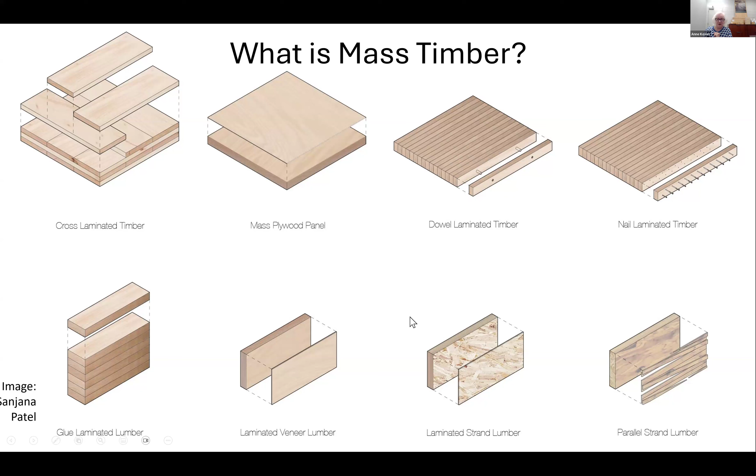I wanted to share with you some of the reasons why I am so committed to mass timber, and I think you'll share some of them with me, knowing as I do what your interests are and your passions as OWA members and woodlot owners. The first are the environmental benefits of mass timber.

Here I've very quickly indicated what I see those as being very compelling reasons. They lock in more carbon than steel or concrete. They have decreased emissions associated with them. The potential for reuse is enormous. And renewable sourcing — and by renewable sourcing, of course, those of us who understand forests and manage forests understand sustainable forest management.

It's exciting to talk to OWA members because I don't have to go into much description. When I talk about sustainable forest management, you understand very much what I'm talking about. Most of your properties are operated under a managed forest tax incentive program, which requires you to do responsible forest management for conservation purposes or for some commercial purposes.

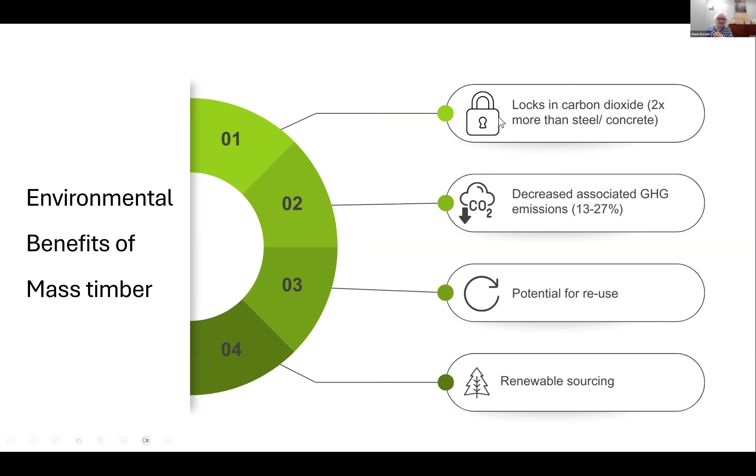We had a number of pulp and paper mills; we're now down to maybe 3 or 4. We had a number of veneer and panel board mills, and we're now down to 6 or 7. So the number of enterprises in the Ontario landscape with respect to forestry has really declined. And for those of us who are foresters, forest owners, conservationists, or environmentalists interested in what we're going to do with our forests, there has been a huge change in the Ontario mill landscape, which requires a reimagining on our part about what is the best end use for our wood.

As we know from sustainable forest management processes, we have the most extensive, highly regulated sustainable forest management legislative scheme globally. Anyone in the forest industry will complain and tell you about how difficult and challenging it is to conduct forest operations in Ontario, and that's something that's both challenging but also something we can be proud of. So I come to the conclusion that we have wood, and what is the best value for the wood that is available for us. And that leads me to the conclusion that we need to have higher value for our wood.

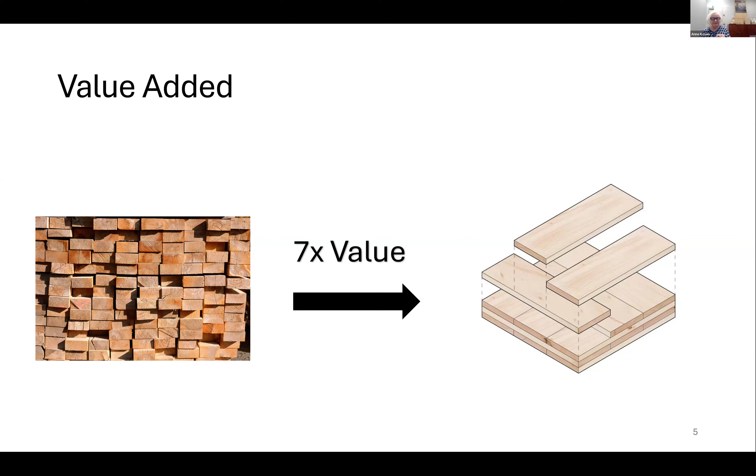One observation that I've had about the mass timber sector, and again, I'm sitting here at the University of Toronto in downtown Toronto, is that there has been, certainly for the last 5 or 6 years, a great deal of excitement about mass timber, but I would describe it as a bit frothy. I see lots of plans for mass timber buildings, but I see many fewer mass timber buildings being built than I think the publicity suggests is happening.

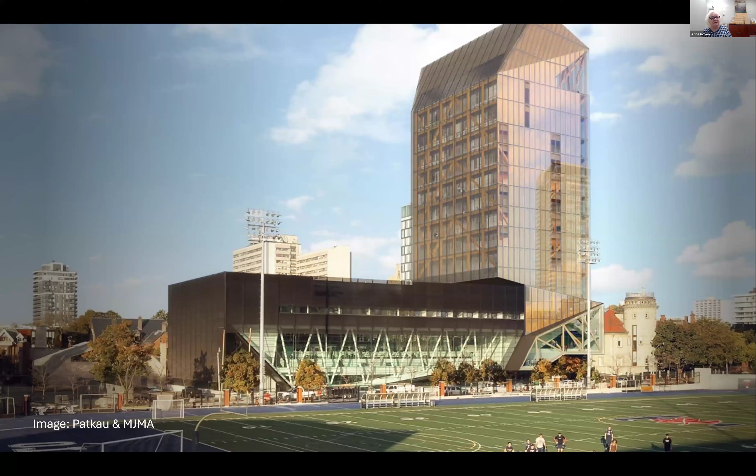This is the infamous U of T tall academic wood tower that's going up at 100 Devonshire. I was at one of the first meetings where we discussed building a mass timber building at U of T. That must have been back in 2013, 2014. It's just being built now, so you can understand the amount of time it takes to plan and actually get a mass timber building built.

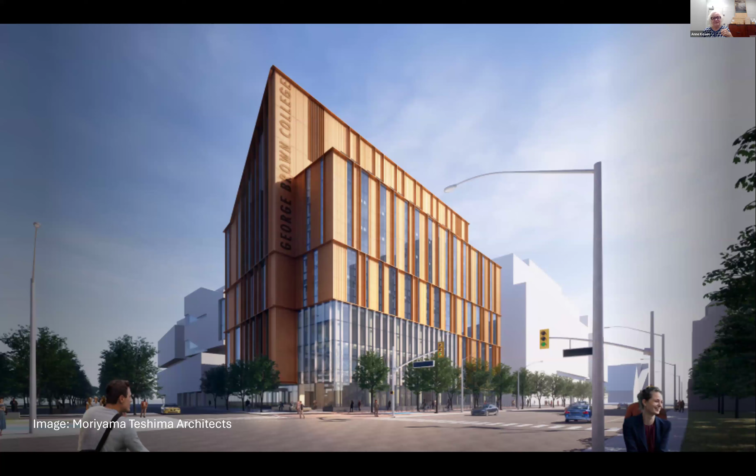This is the Limberlost Place at George Brown College, a gorgeous development sitting on the lakeshore near Cherry Beach. Again, the idea that we have universities and colleges who are really leading the charge on mass timber developments.

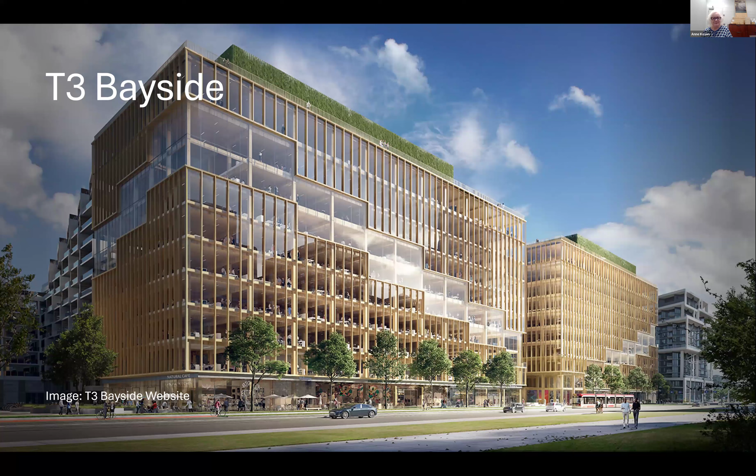T3 Bayside. This is a lovely building, again on the lakeshore, east end of Toronto near Parliament, which is one of the largest commercial buildings. This is the phase 1 building. There will be a phase 2 starting. It was completed last fall, and really is a commercial building, one of the largest in Canada. It was built by Eastern Construction, and it's really a remarkable example of beautiful architecture and design.

Before I leave my slides, I wanted to talk about just a few of the challenges that mass timber is facing, and I think they can be put in 2 categories. These are very top level observations. The first one is that we don't have a strategy in Canada for building with mass timber. We have competition among the provinces. We have very small funding from the federal government. As a result, I think we get mired down a bit in what we could be doing much more. There simply is no strategic application going on.

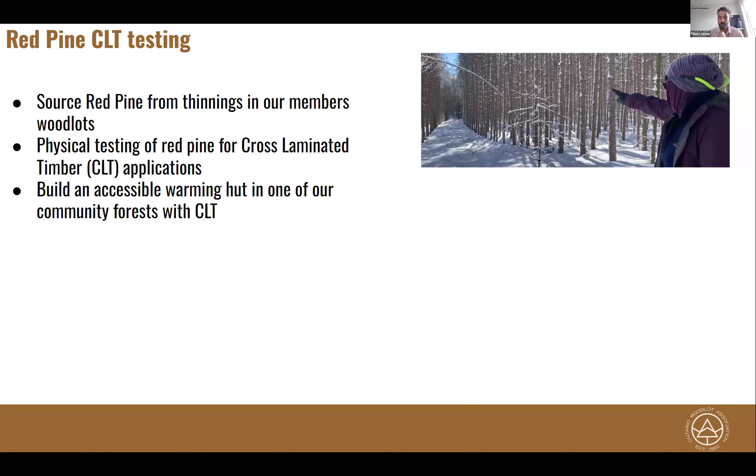Good to see many familiar names in the participant list. So like Olivia said, I'm going to talk a little bit about how we've sourced some red pine from thinnings in our members' woodlots, the physical testing that's been happening at the Mass Timber Institute on this red pine, and then our plans to use that cross-laminated timber for an accessible warming hut in one of our community forests.

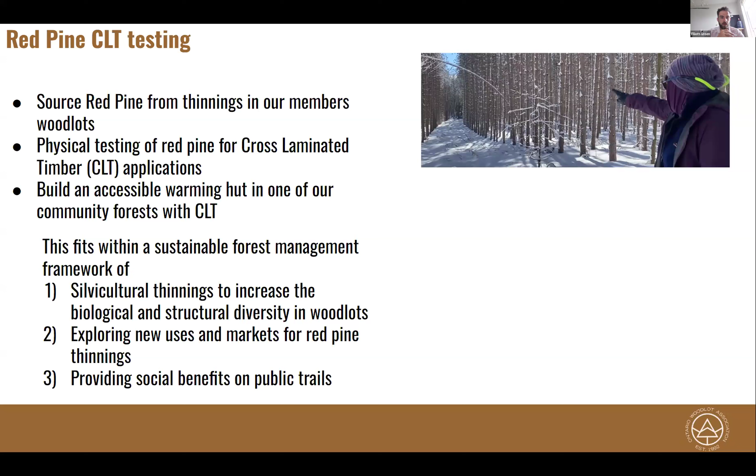And all of this fits within a sustainable forest management framework. We're covering off ecology by doing silvicultural thinnings to increase biological and structural diversity in woodlots. We're covering the economics by exploring new uses and markets for red pine, and providing social benefits as well on publicly accessible trails.

Shout out to our partners: Ontario Ministry of Natural Resources and Forestry, Mass Timber Institute, Kawartha Land Trust, Ontario Power Generation, and Koven. All right, so that picture is what a lot of red pine plantations look like.

Buckthorn, dog strangling vine in the understory, and wood that is either just at or just below the size where it could actually be sawed up into 2x4s.

So for the red pine for this cross-laminated timber project, we got that from one of our member woodlots in the Kawarthas. And like Olivia said, the aim of that Forest Owners Cooperative project is to provide an affordable means for landowners to take care of their forests.

The initial scope of it has been to facilitate silviculture, including thinning, invasive species control if needed, and some underplanting in degrading plantations.

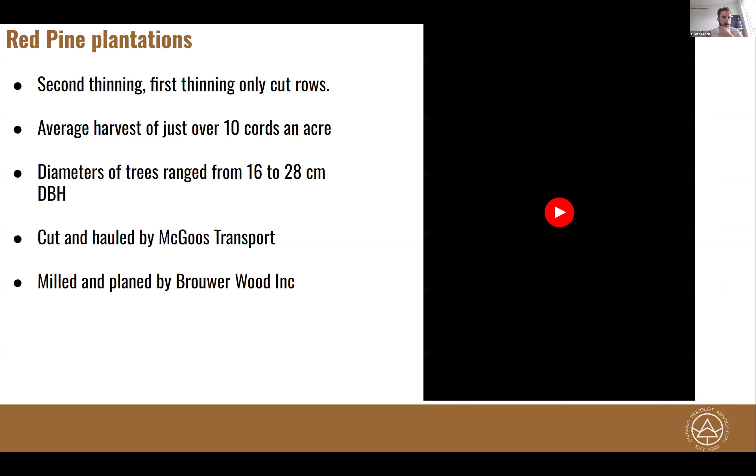So the one that we sourced the wood from was a second thinning. The first thinning only cut rows; there wasn't any selection in between. It's an 8-acre stand, and on average we got just over 10 cords an acre. The diameter of the trees ranged from 16 to 28 centimeters, with those smaller trees being the ones more in the rows that did not get thinned.

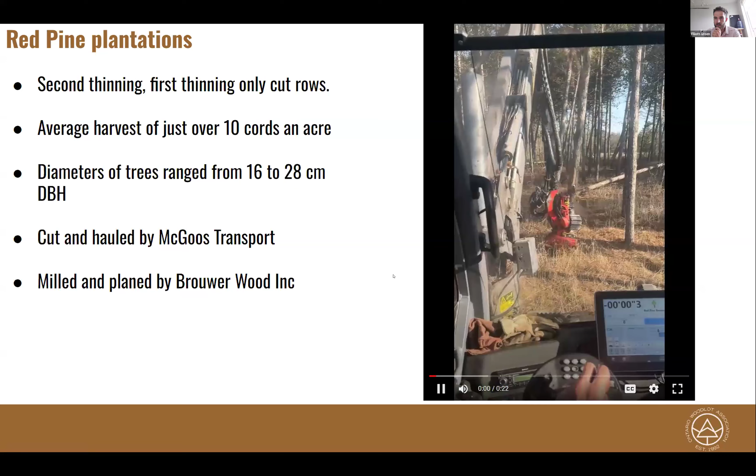It was cut and hauled by McGoos Transport, and then milled and planed by Brouwer Wood up in Keswick. This is what one of those thinnings looks like from inside the cab.

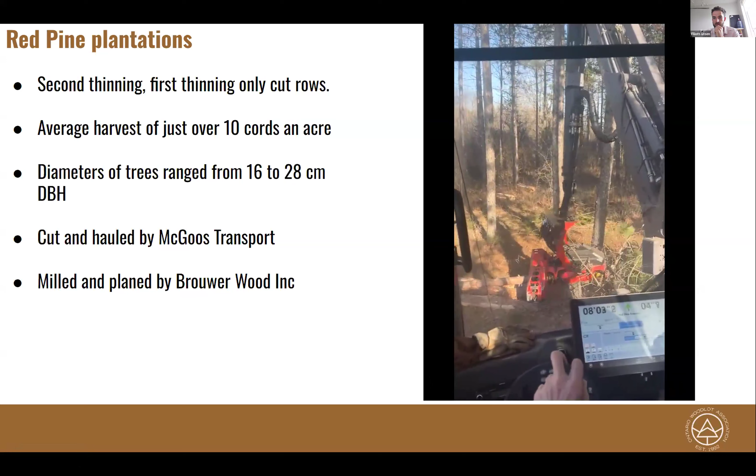So this particular tree, you can see we're getting four 8-foot sections out of it, down to around 5 inches at the top diameter.

Okay, so that wood was sawn up and planed into 2x4s and delivered to the Mass Timber Institute. Tony Ung has been working on it there, so thank you to him for providing these preliminary results.

All of the testing has been following the American Society for Testing and Materials standards. There are three basic metrics we've been looking at: the modulus of rupture, when does the wood break; the modulus of elasticity, how far does it bend before coming back; and the compression parallel to the grain, which measures how it breaks when force is applied in that vertical plane, like a stud versus a beam.

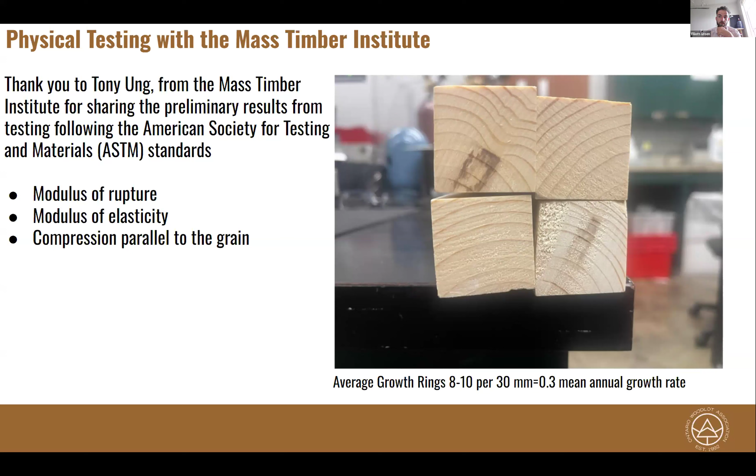You can see here in this picture, a lot of the wood is from the center of the tree. You can almost start to see the pith in some of those bottom pieces, and the growth rate is pretty fast, about 0.3 centimeters a year.

So the first step of what Tony did was a 4-day drying regime in the kiln to reduce the moisture content from 35 down to about 8 to 10%.

While this was occurring, there was significant warping and cupping, especially from the pieces closer to the pith. All of these samples were compared to US grown and Canadian grown red pine, for which this physical testing had already been done.

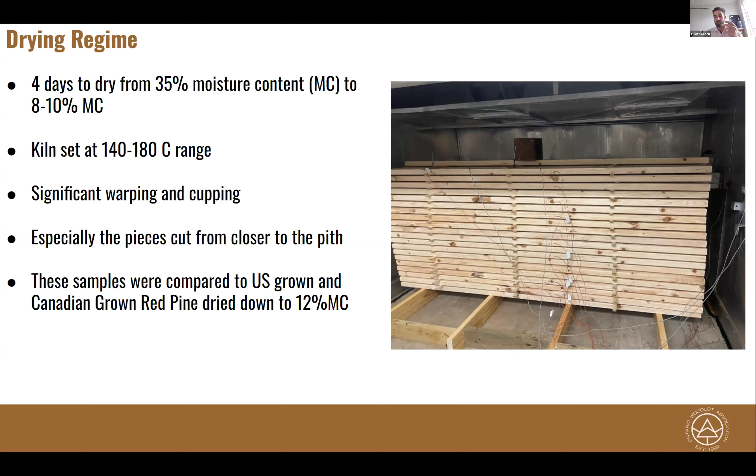This one tests the modulus of elasticity. Basically, you put weight on it, and at the bottom there it measures how much it bends.

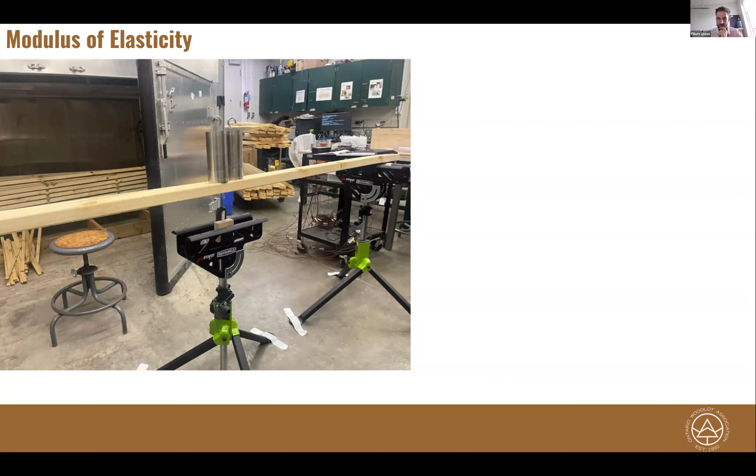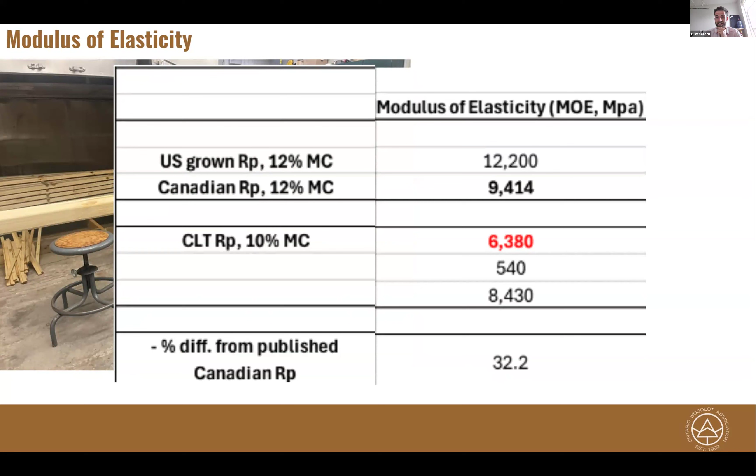You can see here, first line is the US grown red pine, second line is the Canadian red pine, and that third line says CLT RP, 10% moisture content—that's what we got from this particular 2x4. And you can see it's significantly less elastic compared to the published results.

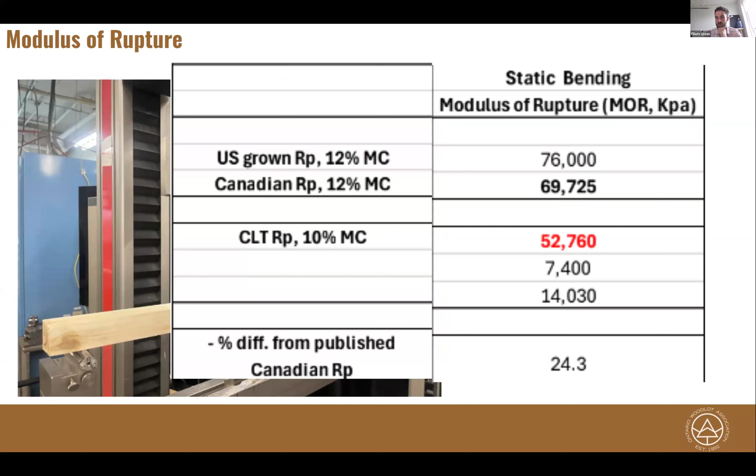Next test, modulus of rupture: basically, how much force can we apply before it breaks? Again, this red pine showed significantly less strength, about 24% lower. The final test is compressing it parallel to the grain, where the difference was smaller, only about 3% lower than the published results.

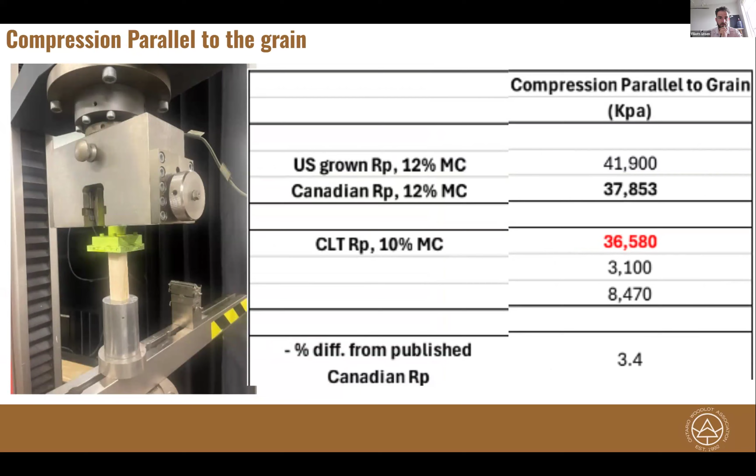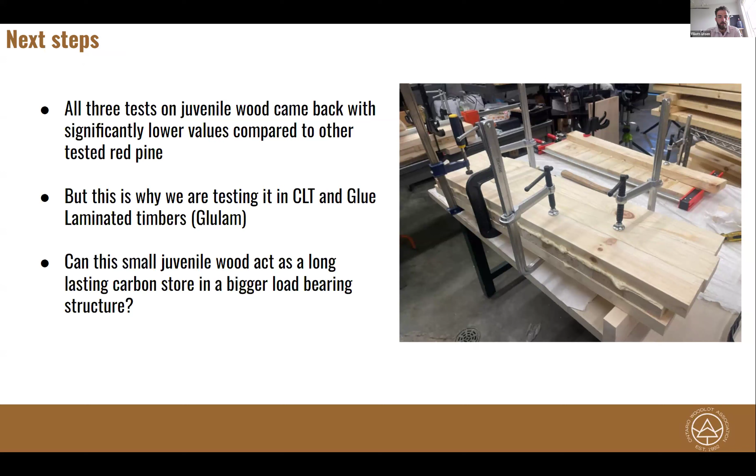So all three tests on juvenile wood came back with significantly or marginally lower values compared to other tested red pine. But this is why we're testing it in cross-laminated timber and glue-laminated timber, to see if this wood that normally goes towards fencing and decking, lasting 15 years or so, can have a longer life in bigger load-bearing structures.

So next step is Tony's been fabricating. You can see here in this picture the cross-laminated timber samples, and he's going to do some more testing. This next setup is a 4-point bend fixture test to determine how much force the cross-laminated timber will break under.

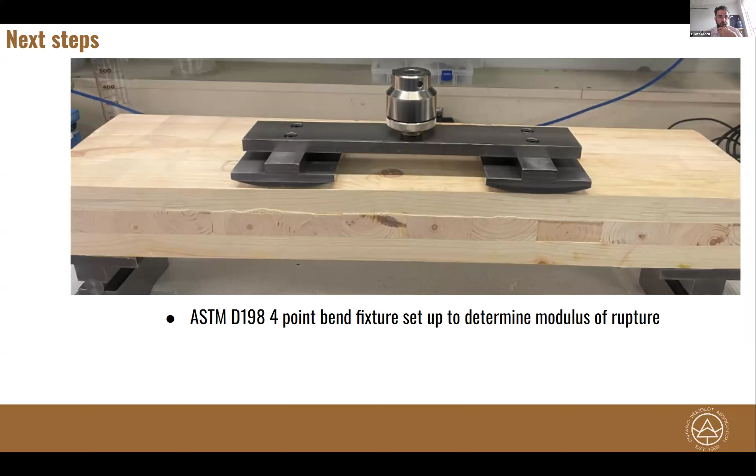Once we have the engineering specs back, we're planning on exploring the long-term market for cross-laminated timber from this juvenile plantation wood. We're going to do that by constructing an accessible, all-season shelter at the community-owned Limerick Forest, in Oxford Station, about halfway between Kingston and Ottawa.

They're one of our FSC certified forests. It's going to be an accessible shelter, wheelchair accessible, and part of a trail they've got set up for that. There will be 6 solar panels on it. The intent is for it to be a place to rest, plan your hike, have a meal, get out of bad weather, and also add to the interpretive trail already in existence at the Limerick Forest.

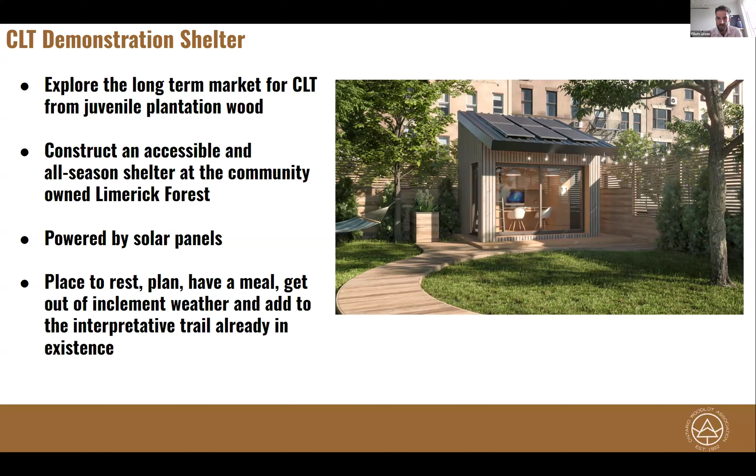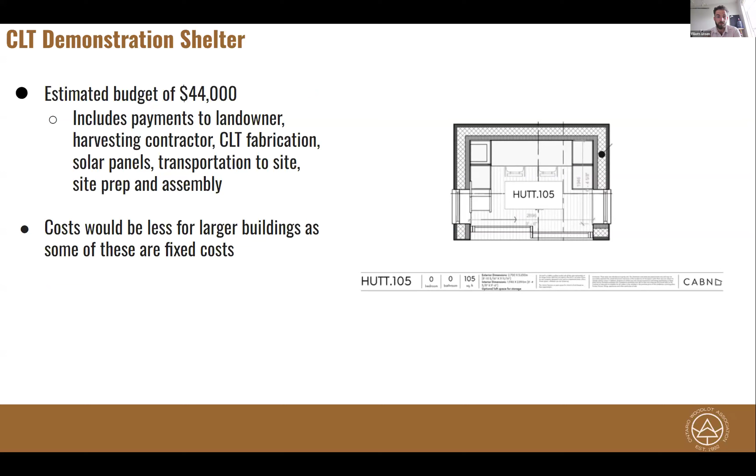My last slide here: the estimated budget is $44,000, which includes payments to the landowner for the wood, the harvesting contractor, fabrication of the cross-laminated timber, solar panels, transportation, site prep, and assembly. It's 105 square feet in layout, so quick math, around $400 a square foot. Pretty expensive, but this is a test — we're seeing if it works, and the costs would be less for larger buildings, as a lot of these are fixed costs.

So we'll leave discussions and questions to the end. That's what I had for today. Thank you.

Awesome, thanks so much, Elliott. That was a great follow-up to Anne's presentation, to see the steps it takes to take a product from design to execution, hopefully.

Thanks a lot, Olivia. All right, I'll get going here. All good there, Olivia? All good.

So I'm going to dust off some old work that I did when I used to work for FP Innovations, where we wrote a case study of an engineered wood bridge at the Petawawa Research Forest. Livy already gave an update, but just so people know, I'm located in North Bay and travel all over visiting folks, though that's my home base. The Petawawa Research Forest is the oldest research forest in Canada, managed by Natural Resources Canada through the Canadian Wood Fibre Centre.

Several years ago, around 2017-2018, a culvert failed on Youngs Creek along Meridian Road, a fairly significant road within the research forest used for accessing research sites, harvest sites, and recreation. Some dedicated PRF staff made the case that a timber bridge would be an appropriate structure to replace the culvert. It's a pretty strong argument that since this is a research forest, within the spirit of demonstration, a timber bridge should be built.

It was the first timber bridge built for forest access in Ontario in many, many years. Since then, there's been a few more — actually one here in North Bay, not too far from my house, but it predates the one on Youngs Creek.

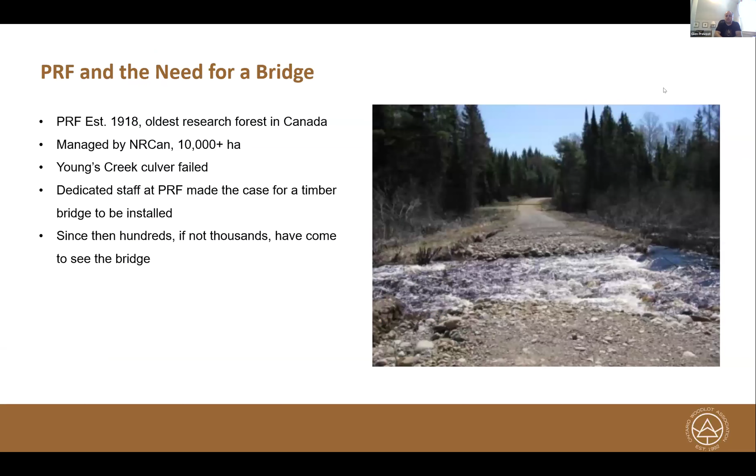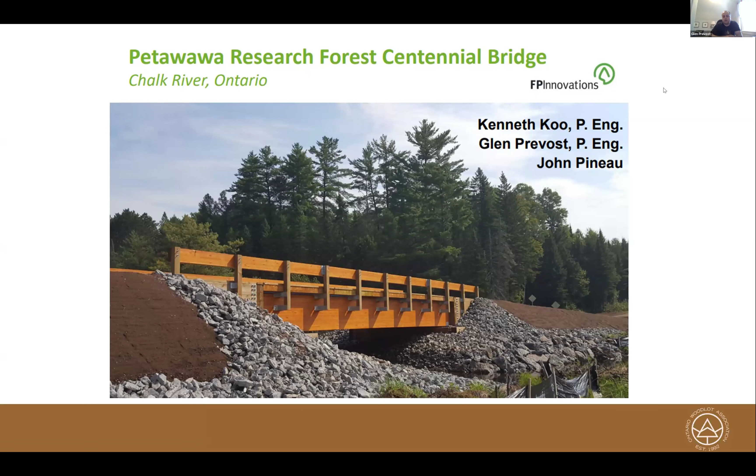The idea is that the forest industry could use its products in construction of forest access, so that they can get into the forest using their own products. So the result, we went from this to this, which I think is a pretty massive improvement. It's a lovely bridge, and this is the cover from the case study that we put together.

Looking at the construction, who was involved, costs, and I'll run through all of that. There were a number of different engineered wood products and non-engineered wood products used in construction. Standard dimensional timbers and heavy timbers - the vertical timbers used in the guardrail were just sawn timber, as was the crib at the end. Then you've got wear boards on the surface, I think they were 2x6 or 2x8s, and they just go on the surface and can be replaced from time to time as vehicle traffic wears them out.

Underneath, you've got nail laminated timber. That is the decking, so that's the lateral support, or the horizontal support. And then you've got glue laminated timber. There's 5 large glue lam beams underneath supporting the whole structure, and those are called girders.

The folks involved - Pete Arbor deserves most of the credit for making this bridge happen. He willed it into existence. I know John Pineau, when he worked at FP Innovations, really prodded Pete and argued that he should do it. But after it got going, Pete was the one who really made it happen.

The structural engineer was WSP out of Ottawa. Corrington Engineering was the general contractor for the site, based in Renfrew County. The Petawawa Research Forest is located in Petawawa, or just outside of Petawawa, which is in Renfrew County. Timmerman Timberworks, a timber construction company just outside of Barrie, did the timber installation, supplied all the woods and the construction drawings. They made the nail laminated timber, remanufactured the glue lam, and did a bunch of the wood treatment as well.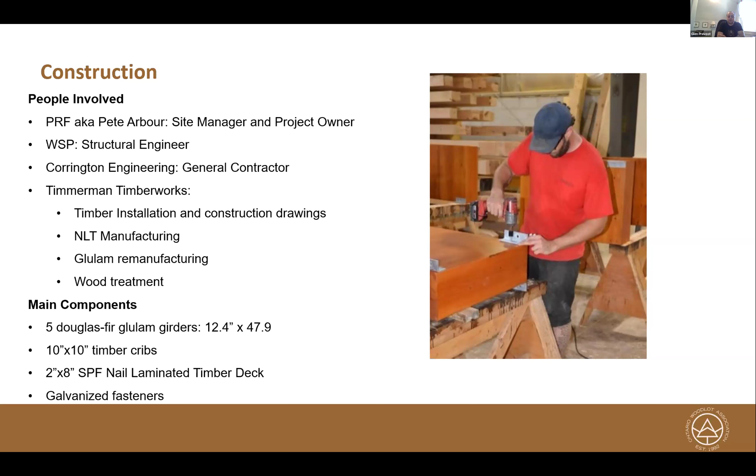The main components were the 5 large glue lam girders, the 10 by 10 inch timber cribs, and the nail laminated deck. I will note that these timbers are so large not because wood isn't very strong, but because there was an elevated standard that the bridge had to meet, since the Petawawa Research Forest is located at Garrison, Petawawa. It had to meet a standard for military use, because sometimes military vehicles would be driving over it.

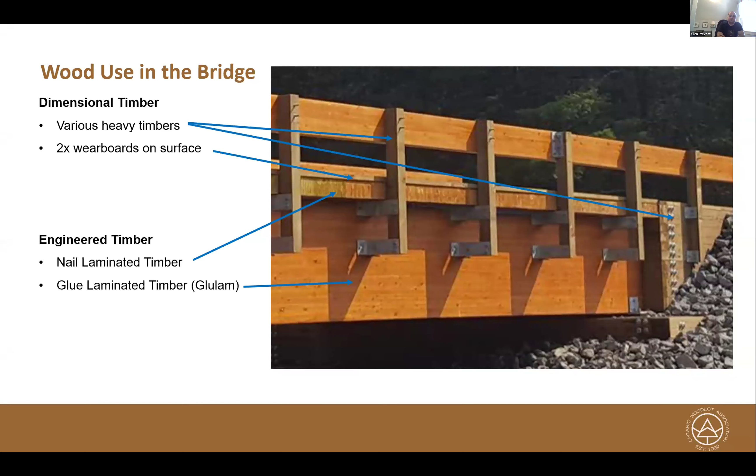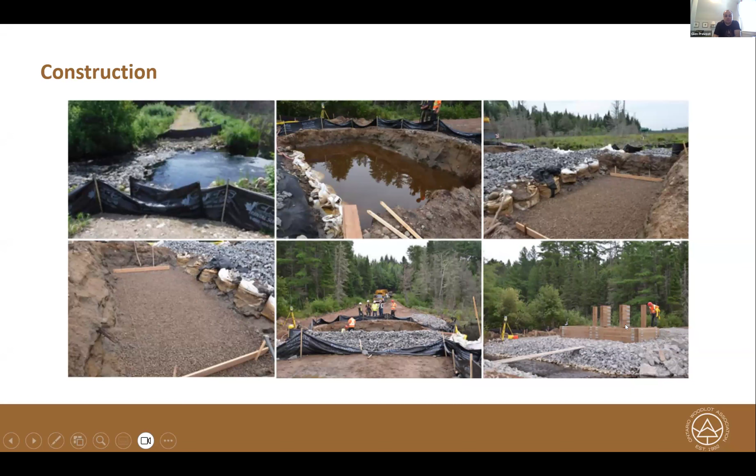Then the construction process, using cranes to lift the different components into place. I think it's amazing that they have these huge, very rigid construction components, and then they can use these little brackets and get it right on the bolt hole. I think that's pretty amazing. You can see there's blue skin on top of the girders, and that's to stop water from resting and sitting on top of the glue lam, helping to resist rot.

You can see the nail laminated timber decks along with the wear boards, and then finally completion of the bridge at different stages.

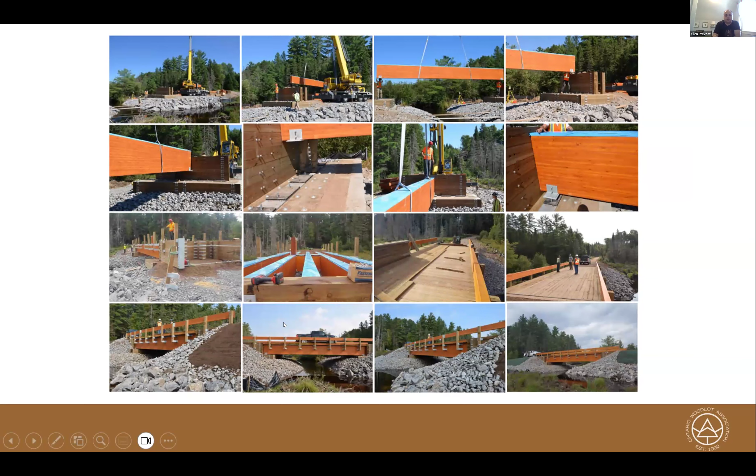So how does this compare to a standard forest access bridge? The top left is the Centennial Bridge at the Petawawa Research Forest. The bottom right is a standard forest access bridge using standard Ministry of Natural Resources designs for bridges constructed on Crown land. And I won't mince words, the Centennial Bridge looks a lot nicer than the steel-based bridge. The steel one is utilitarian, works fine, but it's not all that nice.

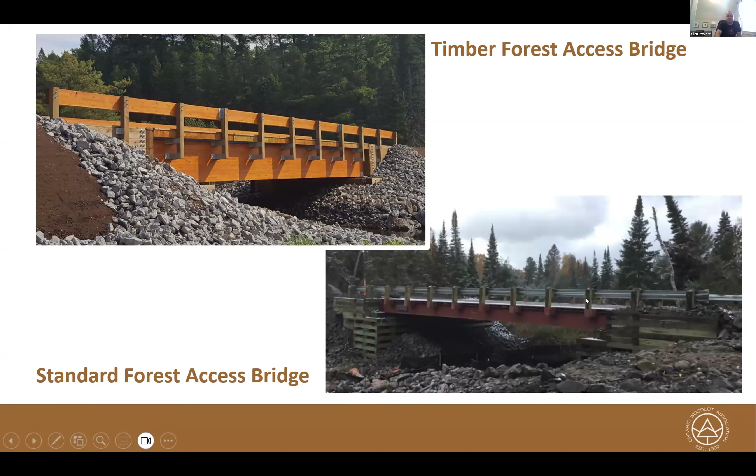You can see where, especially in applications where there's high recreational use or a lot of traffic over the bridge, you might want to, purely for aesthetic reasons, never mind all the other benefits, put in a timber bridge. It just fits in with the landscape a lot nicer than this industrial looking utilitarian bridge.

So obviously people are going to want to know about costs. This was a really challenging exercise to try and figure out the costs, and the reason was that the Centennial Bridge was built on federal land, which kicked in a whole bunch of environmental assessment processes and government procurement processes that just drive up the cost. But I was able to get down to it.

For the main components, the glulam girders, it's a very similar cost, maybe a little bit more at shorter lengths, but at longer lengths you're looking at very similar costs. The cribs on both bridges, while different, were both made out of heavy timbers, so really it doesn't matter which one you use. You could come to a design that worked and was economical. So they both use timber there, so that's good.

The decking, the Centennial Bridge used nail laminated timber, while the Ministry of Natural Resources uses 8x8 timbers. Designers could choose one or the other. Again, it's both different, but both wood, so that's great.

The engineering and design costs: if the Centennial Bridge had been constructed out of steel and concrete, the engineering design would have been more expensive. Now, that doesn't mean the design of this bridge was less expensive than the standard Ministry of Natural Resources bridge, but that's because the Ministry has standard drawings that all their bridges can be drawn to. A similar thing could be done for forest access bridges like the Centennial Bridge made out of timber. You could have standard drawings that would dramatically lower design costs.

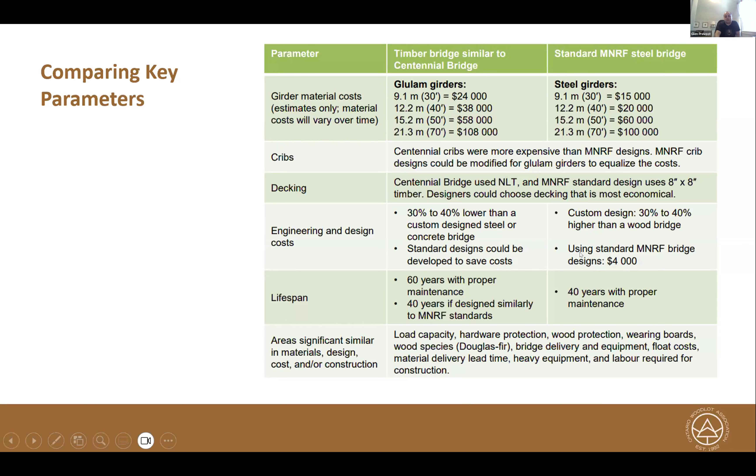So that's it. If anybody wants to go see it, it's open to the public. You can go to Meridian Road at the Petawawa Research Forest and have a look at the bridge. And Olivia, that's what I've got. Awesome, thanks so much, Glenn.